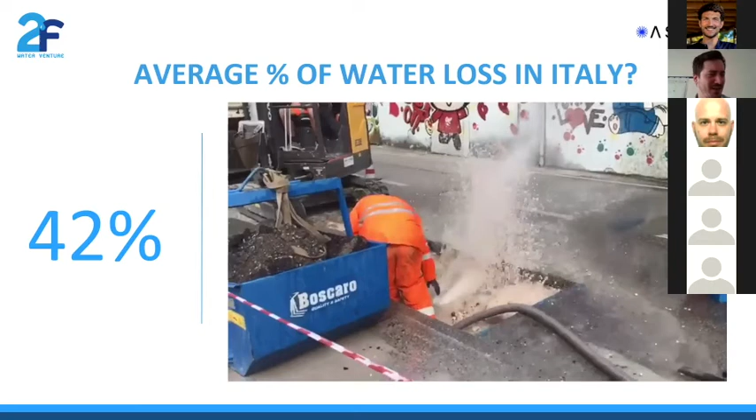42%, more or less. More, because this number is increasing from 2019 to this 42% of last year, we suppose. So it's increasing, yeah, 42%. You can imagine to put 100 liters inside a pipe, okay? And after a meter, you have just less than 60. So 42% of the water in the pipe network is lost.

It's lost due to many things, mostly because of the physical leaks. There are many types of leaks. Main ones are the physical, so the pipe, so water lost in the ground, and that's the main focus of the presentation and the technology.

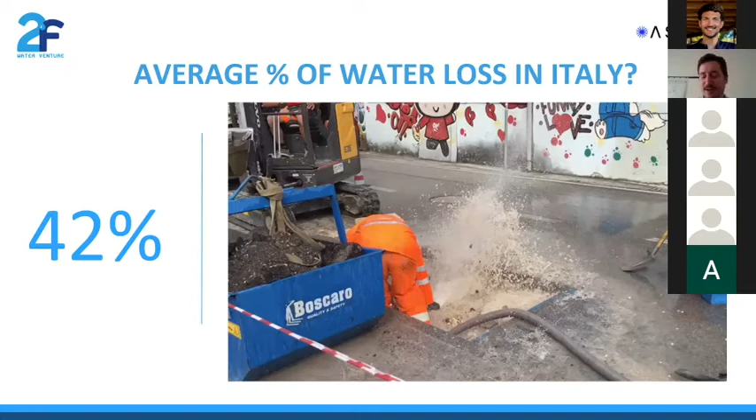So let's start with the global overview. Let's talk a couple of minutes about sustainable development goals. I hope you all know these 17 goals that are from the United Nations, I think it's 2015. They proposed these 17 goals to be more sustainable, to fight against climate change, to fight against poverty. It's a global act, so every nation should respond to these goals, to these parameters, in different approaches, of course, but all of these are important to have a sustainable development all around the world.

In particular, number 6: ensure availability and sustainable management of water and sanitation for all. Here in Italy, in Europe, sometimes we know that water just comes out from our houses, but you should know that all around the world there are many issues about water, about contamination, about water scarcity, and this number 6 has many bullet points.

How much does water, raw material, cost? Usually in Italy, the bill is about €2 per cubic meter, from 1.5 to 3, more or less. It depends on the area, it depends on North Italy, South Italy, big companies, small companies. Just give me some data.

It's €0, yes. Water in Italy is free. We had a couple of referendums also about this. What does it cost? It's the maintenance, it's the energy of the pumps, of the wells, it's the operators' paycheck. You pay the service, you don't pay the raw material.

That's why we have in Italy one of the lowest prices of water. All around Europe, you have much higher costs because of many things. In particular, for example, I don't know, France, they have private industry, so they pay water - the companies want to do profit from it.

In Italy, up to the 90s, there was the municipalities that controlled the networks, and politically, the logic was they wanted to maintain the costs so low because of elections, you know? But from the 90s, in North Italy, Central Italy, they started to aggregate the municipalities into like industrial companies, but with the partners being the municipalities, and so they can aggregate, put money together to have bigger investments with long-term investments and logic.

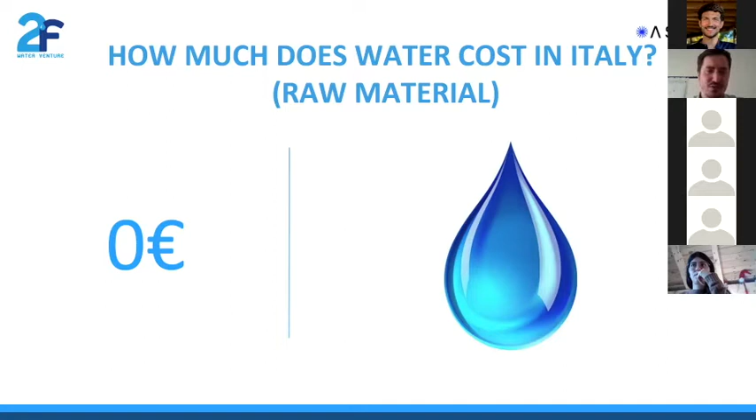So they started to push infrastructure renewal, but in South Italy there's still many municipality utilities, so there's no industrial use.

2F Water Venture - I'm part of 2F Water Venture as COO. 2F Water Venture is based in Padua.

IWS partner, integrated water care systems. It's 3 companies: one is 2F, the other is BM Tecnologie Industriali, also based in Padua, and they have the same owner, Franco Masinello.

2F is the youngest company, it's 5-6 years old. BM is 30 years old. And the third company is Idrostudi, based in Trieste, Italy.

BM and Idrostudi in Trieste are specialized in optimization, mathematical models, DMAs in the water system, in aqueducts, and in sewage.

2F is the innovative company that tries to bring new things to Italy from the water markets. From 2017, it is ASTERRA's Italian partner. ASTERRA is the SAR technology company based in Israel.

We have 4 leak detection teams that search for leaks all around Italy, and we have 3 leak detection teams external.

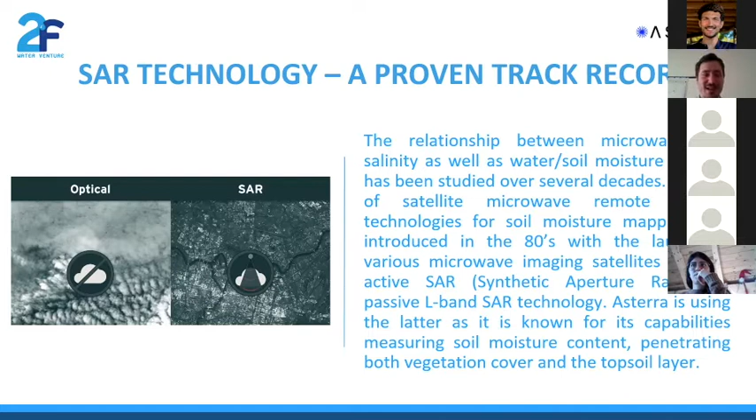For example, our L-band is used to find materials, so it's sensitive to dielectric properties. It's used to determine the material of the target on the ground.

The satellite is 640 kilometers from here, more or less. Our satellite is Japanese, ALOS-2.

It works with all-weather capability, so with clouds, without clouds, day or night, it doesn't matter. It can scan the ground, also with vegetation. It penetrates 2, 3, 4 meters of the ground, depending.

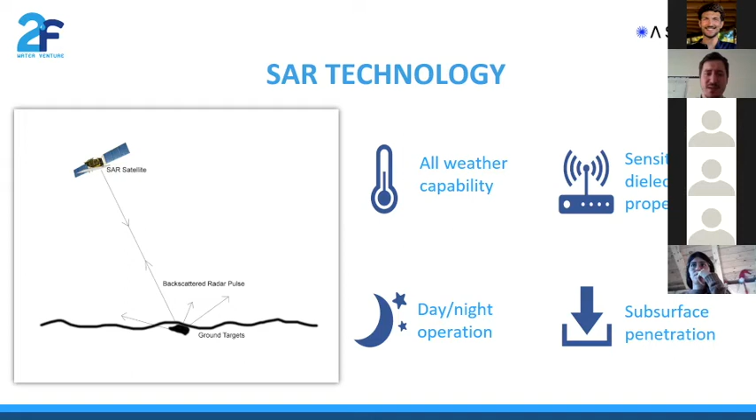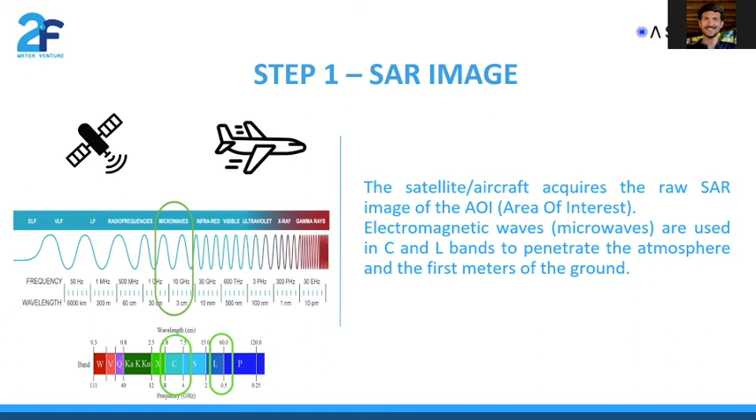So what's the first step? First step is to find an area to investigate. For example, our customers are the water utilities, for example ACEGAS, HERA, ETRA - maybe you know them here from Padua and Veneto region. So it can cover all the territory managed by the water utility.

It can be thousands of kilometers of pipes. Just to let you know, a SAR image taken from the satellite covers 50 by 70 kilometers. So it's pretty huge. We can also take it from aircraft.

We started a couple of years ago with pilot projects. Now we are expanding all around Italy. We are the first in the world using aircraft to take SAR images.

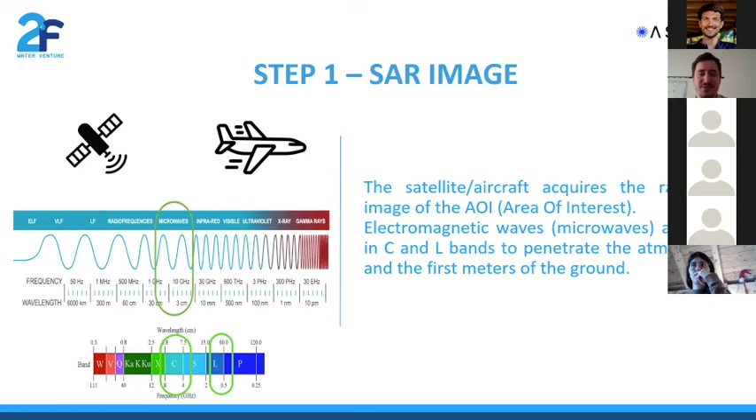So, as I told before, we use microwaves in L-band to penetrate the atmosphere and the first meter of the ground.

The second step, maybe ASTERRA - ASTERRA comes from Astra plus Terra, so to catch the sky with the ground.

Okay, it prepares raw data for the analysis. So the SAR image has to be cleaned, has to be prepared for the algorithmic analysis.

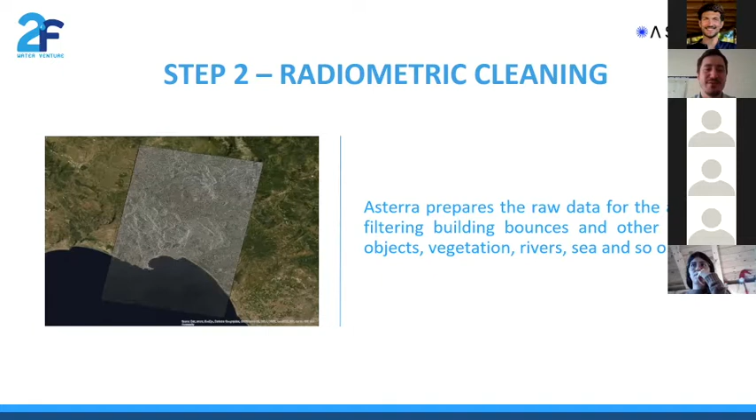Okay, what does the algorithm do? We find water in the ground.

So what's the process? If there's water, and it's potable water in the ground near a pipe - because we have the GIS part of the network - it could be a leak, of course. So the dielectric constant of water, we know it's more or less 80.

So we can find water. Then we can highlight the drinking water that has its own conductibility based on salinity. That is more or less from 100 to 800. You can imagine distilled water has so low salinity, while seawater has a high level of salinity.

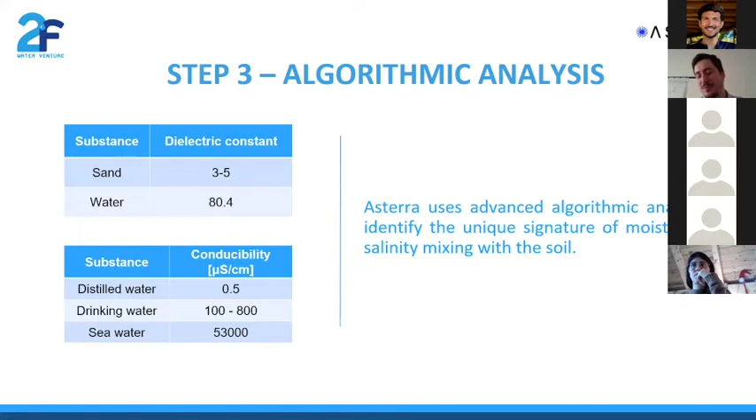We can distinguish them. The first step is to deliver a pre-localization of the leak. So where we found potable water in the ground, soil moisture near a pipe, we put a POI, a point of interest. We can detect hundreds, thousands of POIs in the water utilities network. It's all digital. We have, of course, also paper ones, but we prefer to use apps and dashboards.

To have real-time monitoring of the project and its KPIs, the client can see minute per minute, not day per day, how it's doing, how many leaks are found, where, with photos, comments, statistics, graphs. It's really useful for them. They can start repairing the biggest ones. They can do programming, they can download the GIS file.

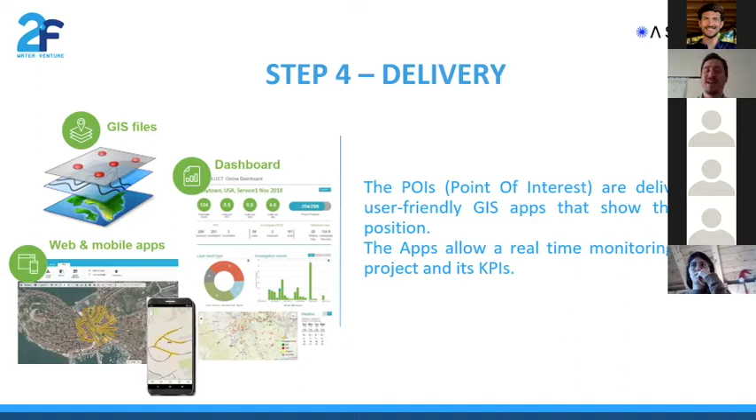I don't know if you all know what a GIS file is - georeferenced images, so you can put them on software like QGIS to overlay, for example, the leaks, the pipes, the aerial overview of the ground.

ASTERRA, let's talk about its products: Recover, MASTERPLAN, EARTHWORKS. Recover is the most used by 2F. Its goal is to find leaks - leak detection.

You can see the highlighted POIs. A POI is not a single point because there are errors. The pixel itself is 6 meters - that's the pixel of the image. There's a georeferencing problem on the overlay from the image to reality, and also there are other errors.

Then there's an error based on R, so it's a circle with a 100-meter radius. So in this 100-meter radius, more or less, we can find the leaks. We go to check for the leaks, but now we'll talk later about the standard technology.

So it's used for detecting leaks based on apps. We have smartphone apps in the ground, in the field. Our detection teams can upload in real time the leak, video, photo, estimation, priority. We can do reports constantly every week.

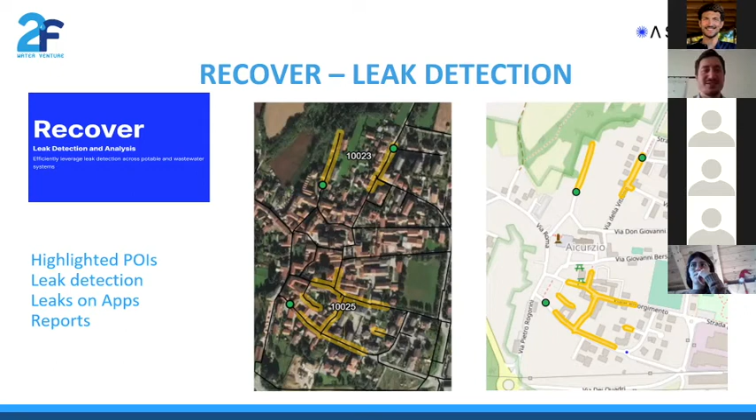MASTERPLAN is also based on such technology, but it uses different images in time and space. So it takes, for example, 2 SAR images 6 months apart from one another, and they see the POIs matching together in the same area, at different timings. What's the purpose? The goal is to change pipes, not to find leaks.

The main problem in Italy is that we have a lot of old pipes. Maintenance is 50 years - that's not useful, or it's not being done. Many meters of pipes are really old. They need to be changed with new methods, with new pipes.

So the goal is to highlight pipes with 5 criticality levels, from the lowest to the highest, to give indication to the water utility to invest in pipe changes. Of course, changing pipes is the most useful thing to do about water loss.

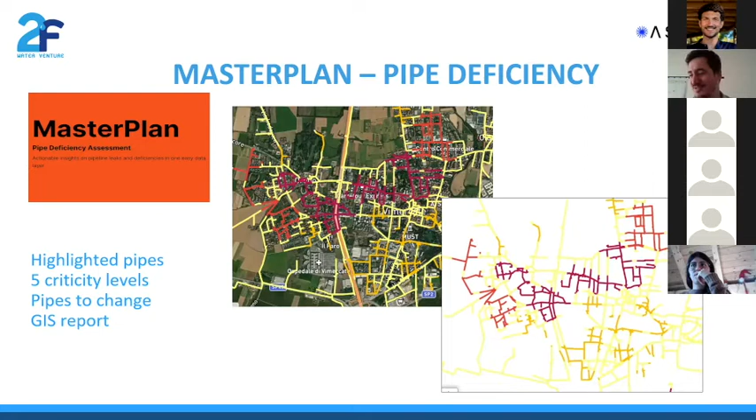It's really costly, because you can imagine just to replace 1 kilometer of pipe costs something like 150,000 euros. So to change 1,000 kilometers of pipes, it's millions and millions, and water utilities don't have this amount of money. Also, our water is so cheap in Italy that they don't have the right investments for it.

The third one is EARTHWORKS, based on some images to find water in the ground. That could be a problem for dams, for bridges, for rails.

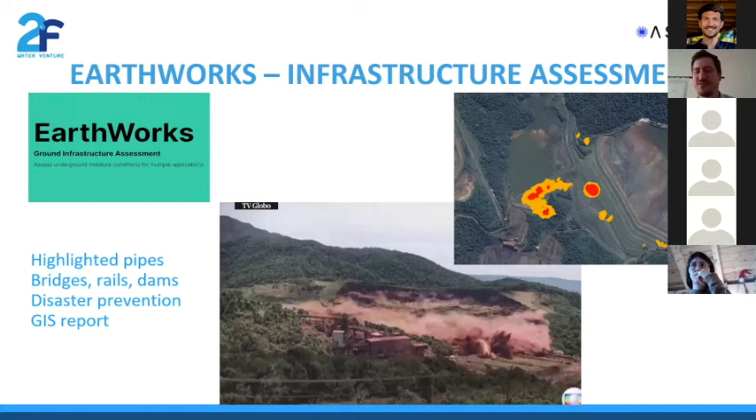So yeah, it can highlight possible problems for the streets, for the pipes, for the houses, and so on. Another one for you guys - talking about water, what do you think?

What's the actual detection technology? What do we use usually all around the world to find leaks? Maybe something to carry around on the street, working with the same technology, like a scanner of the dielectric constant? No, it's much easier - you can imagine we've been doing this for 100 years. Human vision is the first one, and the first pressure made by the clients - talking about pressure, water coming up from the streets.

Yes, but the leak detection teams are using one technology - do you know which one? Water flux measurement, yes, but this is also just a few years we've been using it. We are doing pressure management, DMAs - dividing the pipe network into little areas, easier to manage. Another one is water level - these are indicators of water loss problems. I can see from the tank that water is going out but I'm not billing it, so where does it go? I can have pressure alarms, I can see water from the ground, but the actual leak detection technology is noise. We hear the leaks with microphones, with acoustic sticks.

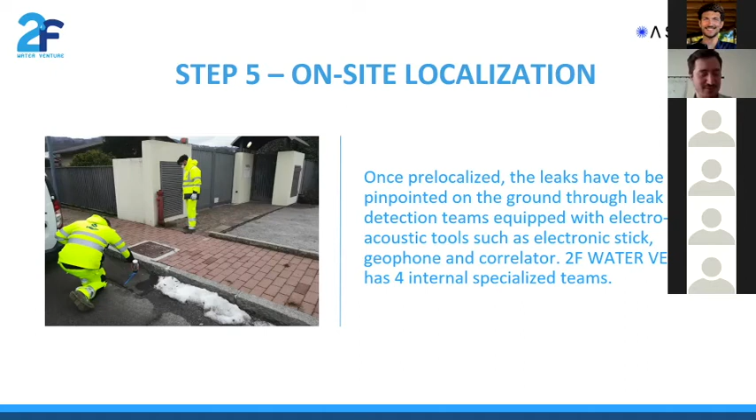We will see in the next minute. So after the pre-localization, as I told you, we need to pinpoint the leak in the ground. We have our internal specialized teams that go all over Italy to find leaks. We use the pre-localization, ASTERRA's pre-localization, but we need to pinpoint the leak, so we use traditional acoustic tools. We can only approach 6-7% of the pipe network usually, so we concentrate our activities in a small area - 100 meter radius per POI - so we don't have to check thousands of kilometers of pipe, just a few hundred, the most critical ones based on SAR images. We can put all the effort into finding a leak in that area.

So I'll show you a couple of tools we're testing here in 2F - a couple of interesting ones. The first one is the noise logger. I don't know if you know what a noise logger is - it's a sound recorder you put in the pipe network. It's just magnetic, so you put it in place. That's a FIDO - we use FIDO because it's really light, easy to use, and technological. It records the sound in the pipes at night.

So you can put it in the water system. During the day - it starts recording at night. Why at night? Do you know why? It's the best hour to find leaks. Do you know why? You can tell me, you can write it. We should do leak detection only at night. Maybe because there's less noise from other sources, like for example the streets. That's right, absolutely - there's much less noise.

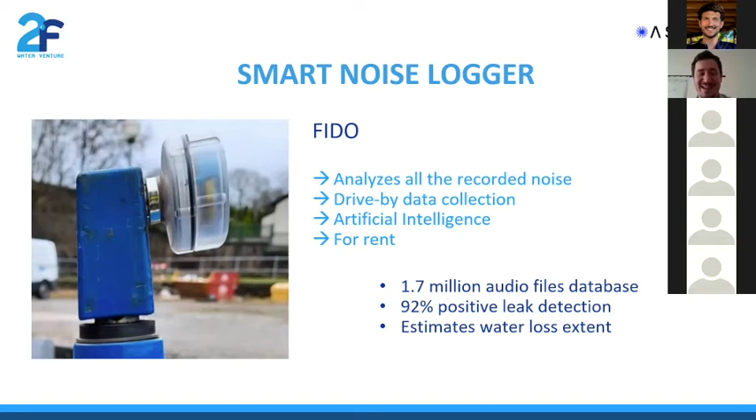So working at night is safer because there are fewer cars - it's easier, there's high pressure, there's less noise, but you can imagine it's impossible to work just at night. So there's technology that works for us. For example with FIDO, you put it out, download the recorded sounds the day after, and the artificial intelligence tells you if a leak is nearby. Of course you still need to pinpoint it. It's based on a 1.7 million audio file database, and it gives you an estimate of the water loss.

Okay, that's the dashboard - the web page where you can see the graphs of the noise. It takes 5 audio recordings in the night, one every hour, from 1 o'clock to 5 o'clock. It records just 7 seconds, and it highlights the noisy ones in red, so you can go out in the field to check the noise and find the leak.

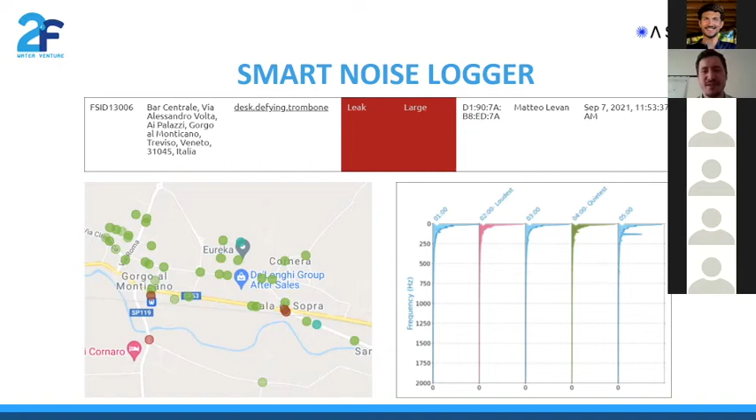There's another point, the mains. What's the mains? Main tracks, the big pipes that come from the springs, from the wells. They go into the tank. From the tank, there's the distribution pipes that go to the houses. But the main ones are big pipes from 250 millimeters to 2 meters. You can walk inside some of them.

What's the problem of these pipes? They are important because they transport a lot of water. So a breaking pipe can cause many problems, huge leaks, problems in pressure, and it causes water scarcity and so on.

The problem is that we need access points to the pipe. We need to reach the pipe to hear the noise. Main pipes have so few access points because they can go through woods, through fields for many kilometers, 10, 100 kilometers with no access points. So how can you check underground with no access points? Probably you don't even know where it goes.

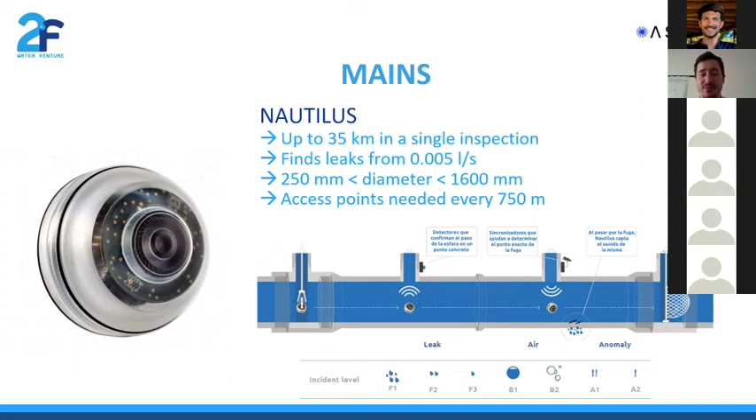It records the sound in the pipe. So without access points, you just need to put some transmitters every 750 meters or so, up to 1 kilometer apart. You can find leaks from as small as 0.005 liters per second. It can detect leaks, big, medium, or little ones, air bubbles, anomalies, for example changes.

I don't know if you can see this video, because usually videos... yes, it's working, okay great.

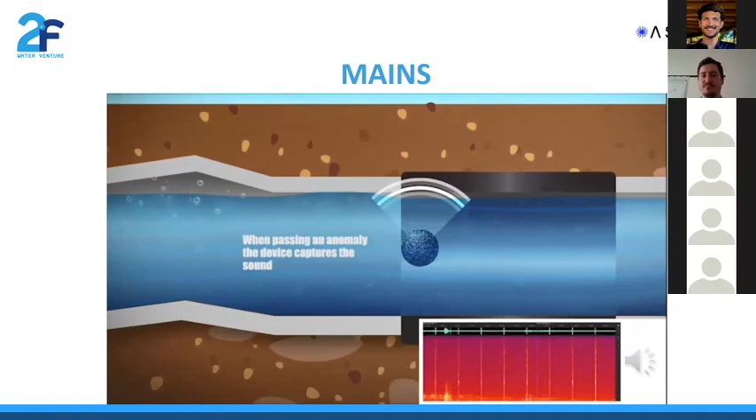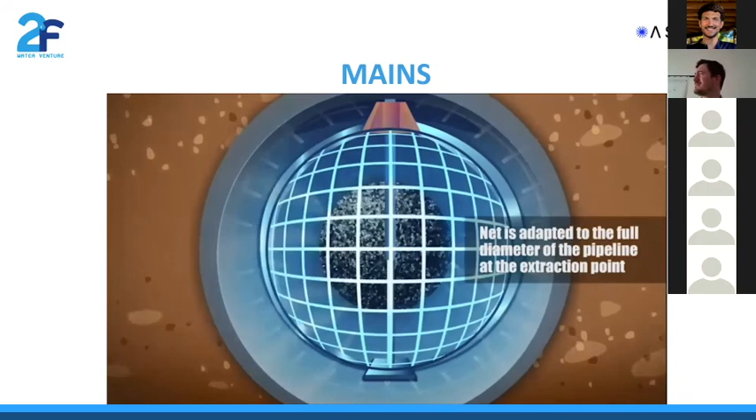That's it, I think it's nice to say Fido and Nautilus are just a couple of new technologies that are expanding all over the world. There are a lot of startups, from Israel mostly, because they're really good in startups based on water, but also America, Italy, UK.

There are a lot of startups, everyone develops their own product to make a contribution to water leaks, to leak detection, because there's no single product that can resolve the problem. There's a multi-approach based on pressure management, changing pipes, DMAs, and proactive leak detection. Only with this multi-approach can you effectively reduce the water loss in the pipes.

So we have also finished that part. I want to show you the traditional tools we use in the field to find leaks. Based on noise, there's the classic acoustic stick. Once it was mechanical, just an iron stick. You can put it on the pipe and hear from the stick the vibration, and if there's any leak nearby. In the last years, it's been upgraded with electronic amplification.

It's light, cheap, easy to use, useful for relocalization of the leak. We use it as a pre-hearing, we call it pre-hearing because we do a pre-localization. We have to check, for example, 200 meters of pipes, we check every access point. You can try to find the access points.

Once you start seeing them, you cannot unsee them anymore. They're always in the streets: hydrants, valves, main valves, service lines, meters, water meters - these are all access points, also the manholes with the pipes inside. We put the stick there.

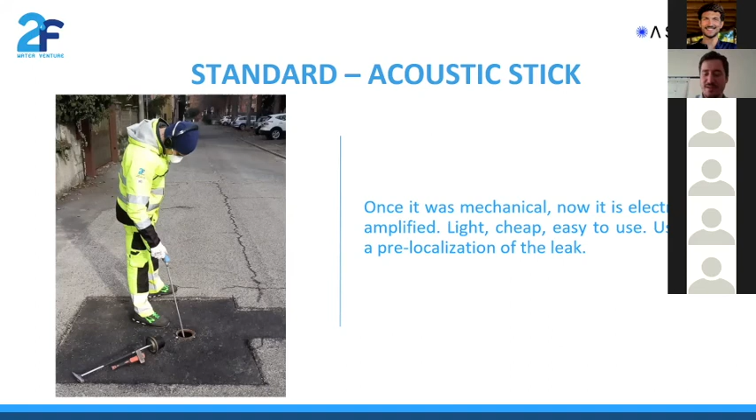We have our headphones to hear the noise. We have the geophone, it's a ground microphone, with a bell-shaped noise protection for the streets against environmental noises. You touch the ground and it detects the noise from underground. So you put it on the pipe, knowing the pipe is under your feet. You move it every half meter and check if there's any noise from underground, like water bubbles, and you need many years to find the correct leaks.

It's used to check or pinpoint a localized leak. Maybe you start hearing noise in a street, you have one access point every 10 meters. You start with the stick: you hear nothing at the first, a little bit of noise at the second, hard noise like this at the next, and then it's decreasing. So you can imagine the leak is at the highest point, and you use the geophone to pinpoint it exactly.

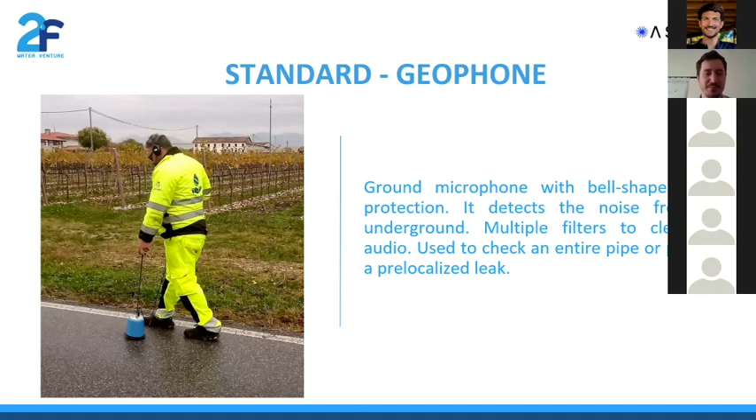Then there's the correlator. We've probably been using it for 20, 30 years, not so long. It uses two sensors touching the pipe, for example in this case the gate valves, and they correlate with a computer the noises from one sensor and the other sensor. Based on diameter, material, and distance between the two access points, they can find the exact starting point of the noise, so the leak point.

So you can put, for example, 200 millimeter diameter, steel material, distance of 100 meters, and it can tell you the leak is 25 meters from sensor B. Why diameter and material? It's important to correlate.

The material could be PVC, polyethylene, so plastic ones, or it could be metallic, like cast iron, steel, also asbestos cement, eternit. Maybe it's because of the sound this material emits when it's leaked. Yes, it can be useful for us.

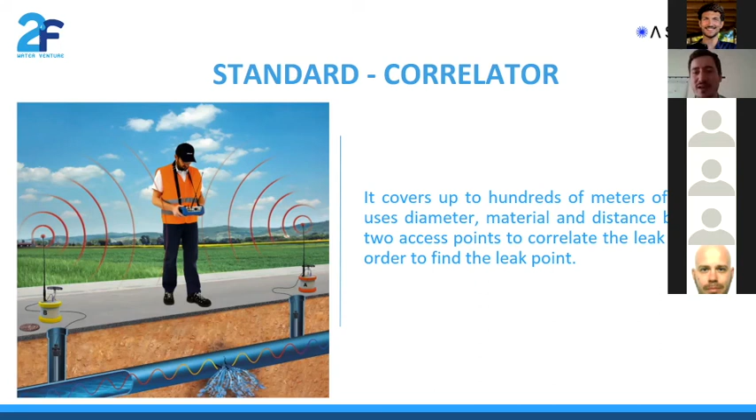So that's the correlator, that's acoustic, geophone, use robots, you can use satellite to pre-localize. There are a lot of tools to find the leaks. Do it, we have to do it.

And we have a great opportunity with PNRR, also REACT-EU, this EU contribution in the post-COVID situation. So a lot of millions and billions coming from Europe, all around Europe, in particular in Italy, as you know. REACT-EU in particular is for 5 South Italy regions: Sicily, Calabria, Puglia, Basilicata, and Campania.

Specifically, they have the higher water loss percentage. If the average is 40-42%, in South Italy you can reach 70%. You can imagine they don't have water in summer, and they are losing two-thirds of the water in the pipe. So they need to change the situation. They need to aggregate the municipalities to have something like an industrial strategy and to invest the money better. And they will have a lot of millions from REACT-EU just for them in 2022 and 2023.